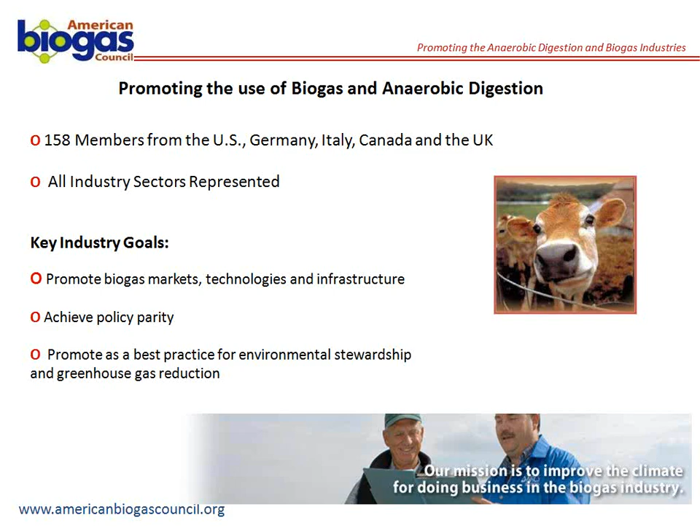To briefly introduce you to the American Biogas Council, we are the overarching trade association in the U.S. that promotes the biogas and anaerobic digestion industry. We have almost 160 members that span the entire supply chain, including manufacturers, engineering firms, project developers, financiers, and many other interest groups. Some of our key industry goals are to promote biogas markets, technologies, and infrastructure, achieve policy parity with other renewables, and promote anaerobic digestion as a best practice for environmental stewardship and greenhouse gas reduction.

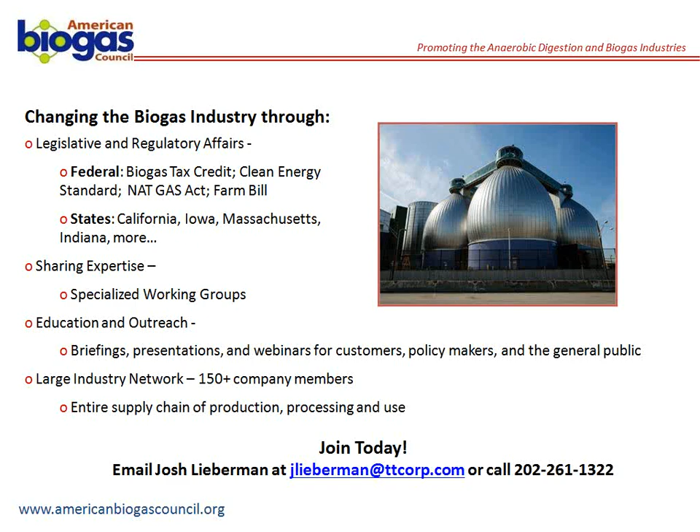We're changing the biogas industry through legislative and regulatory affairs. We lobby for and support public policy at both the federal and state level that benefits and promotes the use of AD and biogas production, through our specialized working groups that draw on the expertise of our members to address key focus areas, and through education and outreach activities focused on building widespread awareness of biogas and its benefits through webinars such as this one, briefings, presentations, and other such means.

So, on to our speakers. Our first speaker is Richard Maddox, he is Senior Technologist at Biomethane. We have Trevor Nicol, who is General Manager at Highmark Biogas, and we have Tom Ferencevich, Vice President of Technical Services at Yield Energy.

To introduce our first speaker, Richard Maddox: Richard has been a Senior Technical Advisor for High Solids Digestion Systems at Biomethane for the past 6 years. He has contributed to over 100 digester projects, including direct management coordination of 20 animal waste methane systems, assessing technical and financial feasibility, financing, design, review, regulatory compliance, energy and byproduct recovery, processing, and sales contracts. He has provided consulting services to both public and private clients in the States and overseas, and has performed several dozen farm and centralized digestion system feasibility studies. And with that, Richard, I hand it over to you.

Very good. Mandy, were you going to advance the slide there?

Thank you very much for this opportunity to discuss a topic that I think most of us will agree is of immense importance to the industry: the methane potential of the substrates that we're digesting. This presentation addresses methane potential of substrates. My fellow panelists will be discussing handling of this often non-homogeneous material that we put in the digesters. Biomethane potential, BMP, is far too large a topic to discuss in only 15 minutes, but I recommend you sit back and listen to the presentation and then go to the slides once they're available. There's quite a bit of material for you. This is a quick review, folks.

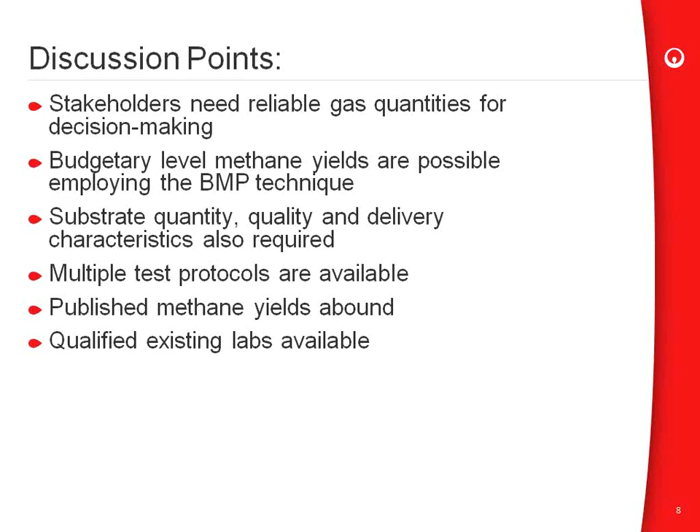The message to be conveyed in the next few moments is that stakeholders need numbers to make rational decisions. The BMP test is one of several ways to know the quantity of gas that can be derived from a waste, and it's a good way to get a good budgetary estimate. Substrate quantities and qualities, as well as delivery schedules, are important to know. There are multiple BMP testing protocols out there, many substrate BMPs that are published, and many testing labs available.

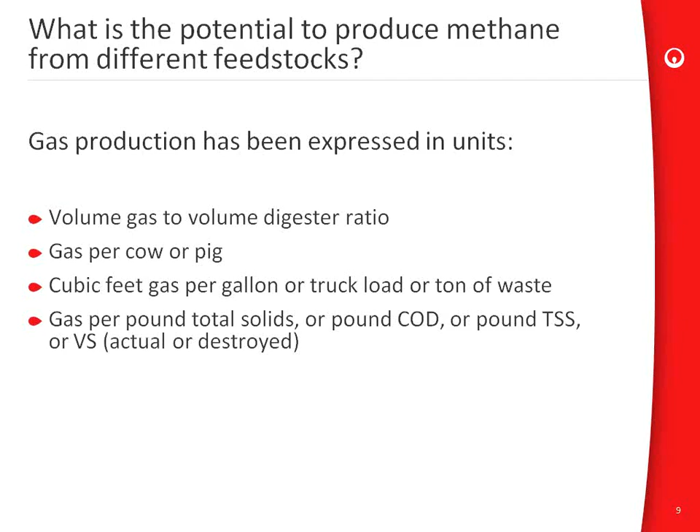The question is, how much gas can be expected from a waste? There are many ways to measure it and to report it.

You probably have heard about how much gas can you produce per digester volume, or how much gas per cow, or how much gas per pig, disregarding whether it's a black cow, a red cow, a pastured cow, or a 70-pound pig versus a 280-pound pig. More recently, we've also heard about cubic feet per gallon, truck, or ton of waste, and increasingly there's awareness that we need to report gas production per pound total solids, pound COD, TSS, or VS.

So what's needed is a single meaningful metric.

The biochemical methane potential is a useful number regardless of waste or condition. Simply put, it's the amount of methane that can be expected from a kilogram of volatile solids in a substance.

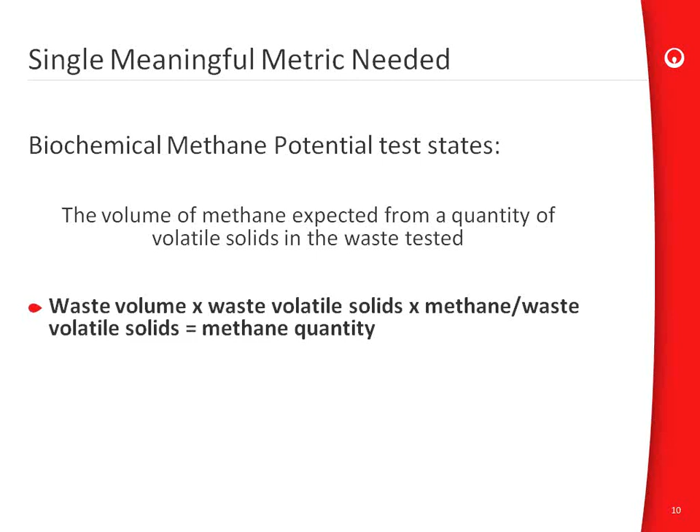Once you know the volume of waste you're going to be processing, and through that the quantity of volatile solids to be processed, you multiply that by the all-important BMP number—the methane that can be expected per unit mass of volatile solids—and you end up with a methane quantity.

Who needs to know the number? Who are the stakeholders? Owners, the money folk, all need to determine the financial viability of their venture.

System designers need to know for purposes of design and peak energy demands. Process designers need it for system and operational designs. And operators need to know in order to formulate their daily recipes.

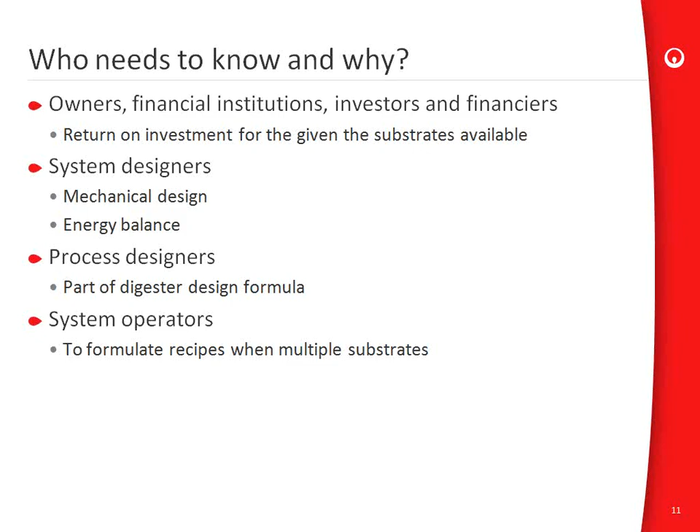We just started up a system not too long ago that works with close to 200 different substrates and substrate dilutions. Tom will talk about feeding the bacteria at a rate so as not to upset them, a bit later on.

Before we start the methane yield discussion, however, we need to recognize and admit the methane yield of a substrate is meaningless in predicting total gas unless we also know what the quantities are of the substrate that's going to be processed.

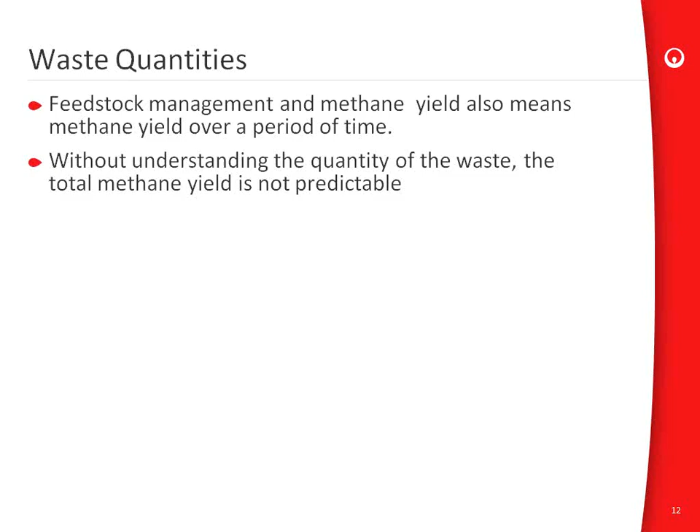The question relating to this substrate availability is: do you design for maximum flow and have stranded capital during part of the year? Or do you design for something less and you see a flare? And the all-important question that's often overlooked: do you have enough gas when you need the energy?

Trevor's going to be talking a little bit later about feedstock supply and availability. Of course, it's a very important topic.

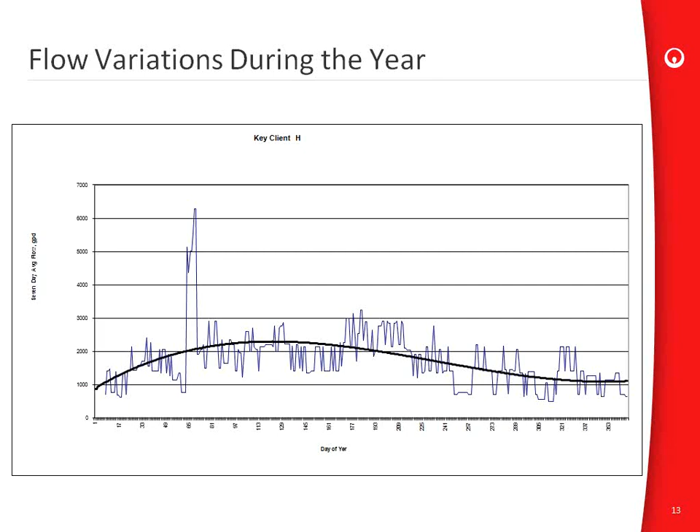So back to the topic at hand: how much gas can be expected from a substrate? There's a variety of different ways of determining how much gas you're going to be able to produce per unit substrate.

These are all ways to derive actual values from the interaction of bacteria with the substrate. One really interesting way to find out how much gas you're producing per unit substrate is to build the system and find out—hopefully you get what you were expecting.

Another, more rational approach, often is to have a smaller pilot scale system, less expensive, and you can still generate good numbers. Bench scale systems are smaller yet, significantly less expensive, and still can generate some pretty decent numbers in terms of how much methane you can expect for the substrate.

What we're going to be talking about more here as the conversation continues is the small scale lab test, the BMP test. BMP tests are small, reliable, inexpensive, and can provide you 10 to 15 percent accurate budgetary values for gas yield of a substrate to be tested. The technique also helps you identify some potential toxicity issues. And there's also...

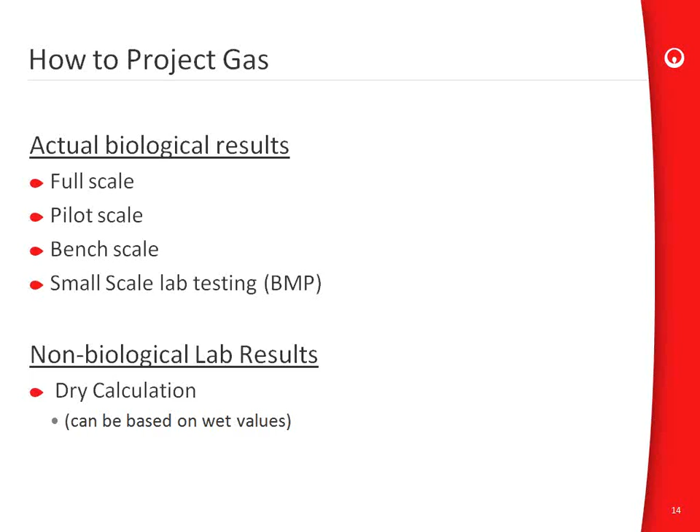Non-biology-based ways of predicting gas: you essentially do spreadsheets using some rules of thumb and perhaps some laboratory analysis combined with rules of thumb.

The BMP test determines the ultimate methane potential of a substrate. It does not permit actual design of the digester. It's a fairly simple procedure: you put a known quantity of substrate in an airtight glass vial with an appropriate quantity of seed, hold it at usually right around 98 to 100 degrees F, and you measure the volume of gas, note the cumulative quantity of gas, and create a curve.

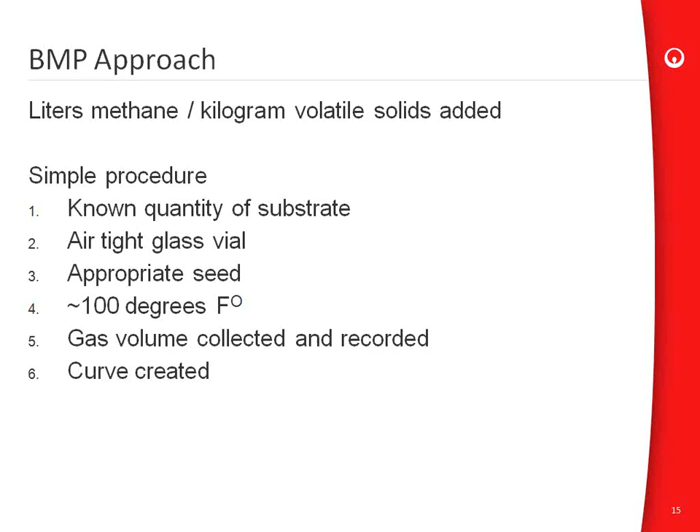But the results are only as good as the laboratory that's implementing them. Labs must adhere to accepted protocols.

They need to maintain good laboratory techniques, use acclimated seed, employ the proper seed-feed ratios, and of course you have to back out of your results the gas that is contributed by the seed itself in your curves.

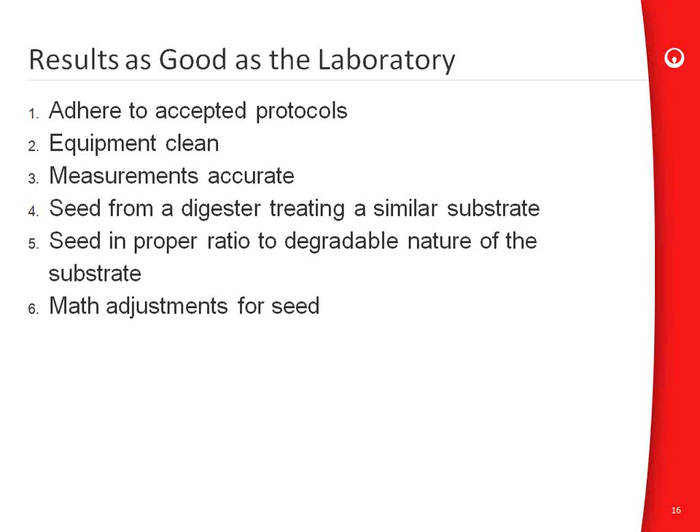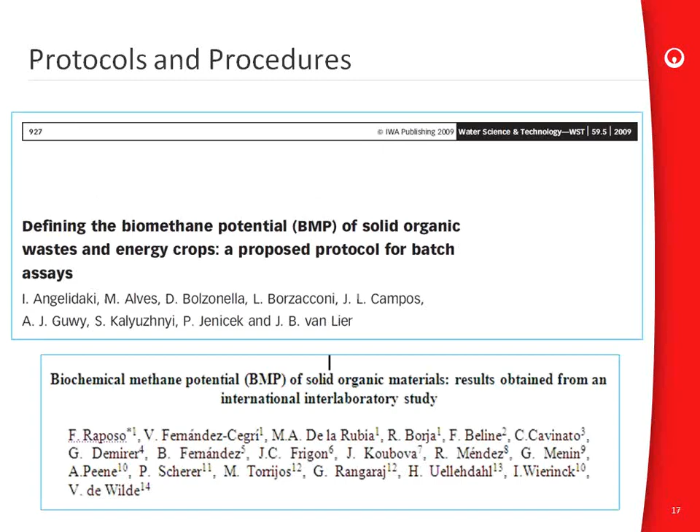Several protocols are available. Here's a few of them. I tried to include a lot of references here so you can go back and find this material yourself.

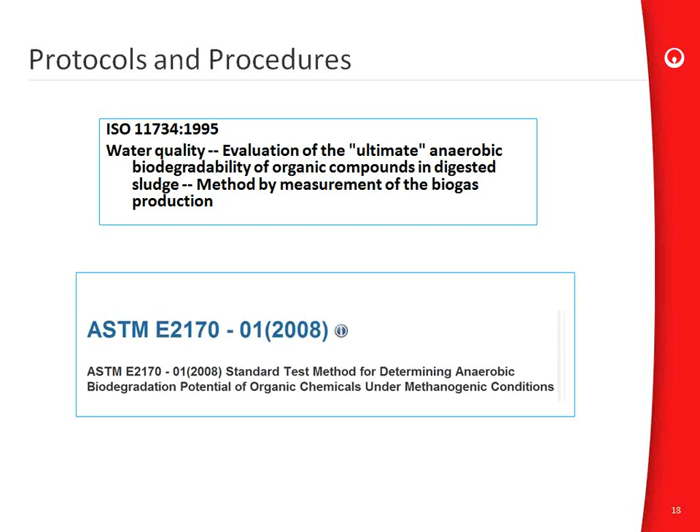You'll notice there's an ISO standard for biomethane potential determinations, and here's an ASTM standard. And here's the granddaddy of them all - a publication put out by Perry McCarty and his colleagues at Stanford in the 70s.

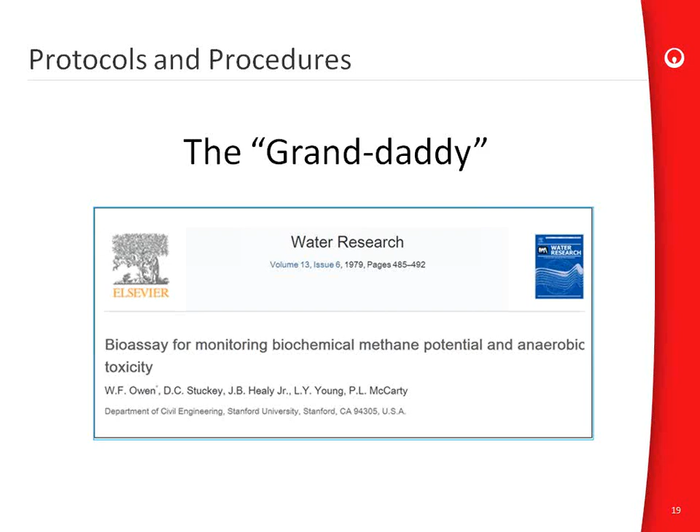Before the test begins, you have to secure and analyze as representative a sample as possible that you're going to be testing. You also need to secure seed material from a digester that's successfully treating a similar type of waste.

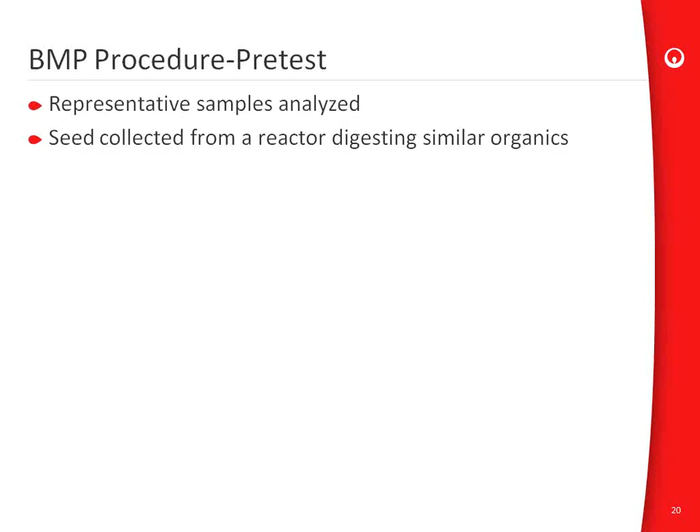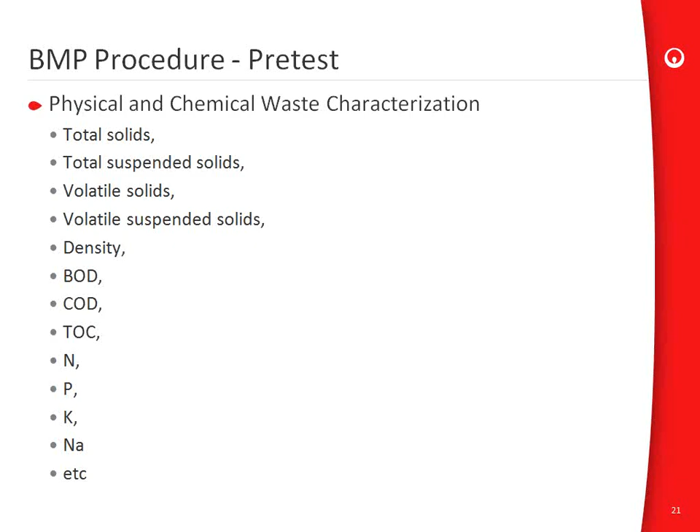Have a lab characterize the substrate. There's a number of different parameters that laboratories will perform, but pay particular attention to density of the substrate and the volatile solids of the substrate.

Getting specifically into the test itself, the test is conducted in vials, often referred to as serum bottles. The protocols call for 160 to 200 milliliter serum bottles. All the tests are done in triplicate.

The experimental design is that you have the actual sample itself, measured in triplicate. You have triplicate vials of that, vials of the sample slightly diluted, and samples further diluted, all with 3 vials each. Then you have 3 vials of strictly the seed material, and 3 vials of an assay material - something where you know what the ultimate methane potential is.

Acetate, cellulose, and others are quite often used.

Procedure: you put in the vial the substrate to be tested, a seed material, and a nutrient mix. You flush that vial with nitrogen and/or carbon dioxide, and seal the vial. You hold it at about 100 degrees for anywhere from 20 days up, depending on what the material is and how the curves look.

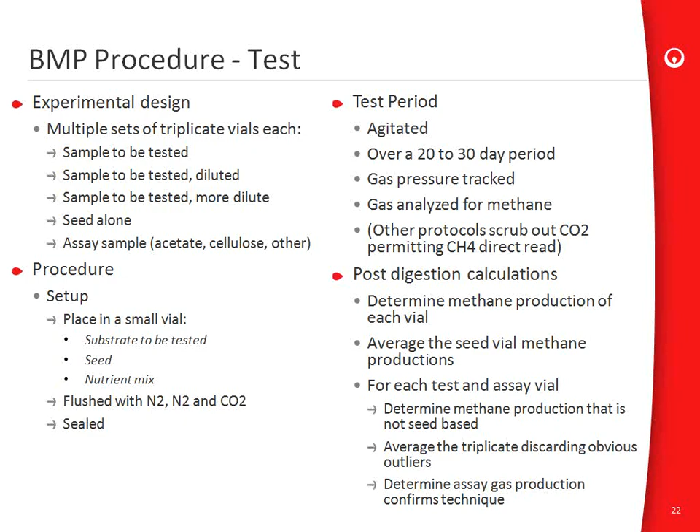The assay test is an opportunity for you to check up on your technique. If you know what the gas should be for the assay material, you're running the test and you'll see how close you get.

An alternative method is to put pressure transducers in the septum of the bottle and through some math determine how much gas is produced on a daily basis. There's also other ways to continually monitor and digitally record the gases being produced.

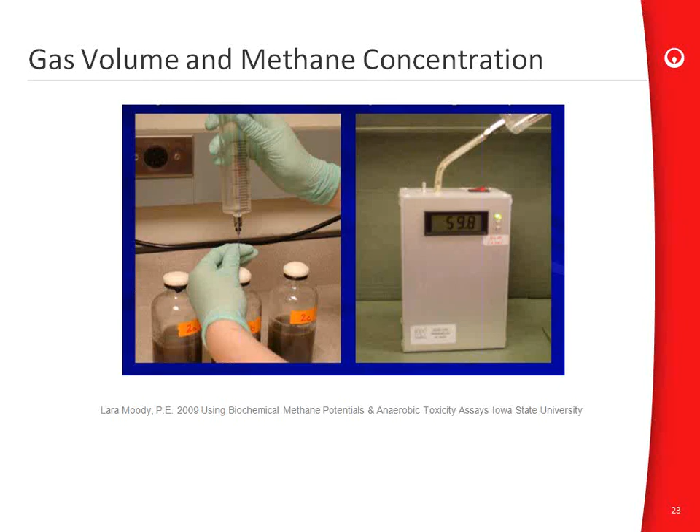What you do then is take the gas volumes determined periodically and plot out the cumulative quantity of gas. What you're looking for is the point at which the gas production levels off - that's your ultimate methane yield.

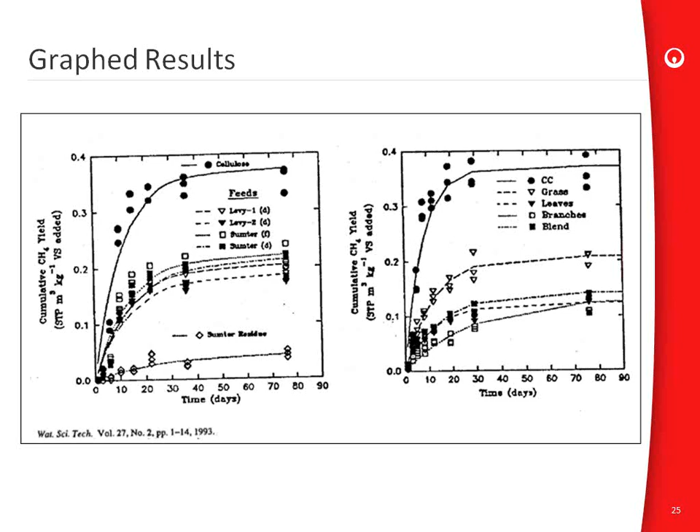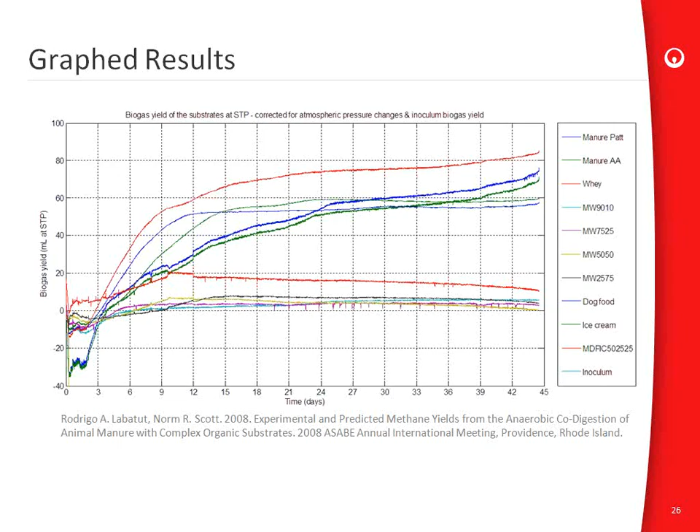Here are some BMP results. Again, go to the citation, and there's many more of these results that you'll see in the literature.

Here's some rules of thumb for you. If you had strict carbohydrates, expect 300 to 350 or so liters of methane per kg VS added. Proteins, a good number to get your arms around is 450 to 550. Fats, 800 to 900 or so.

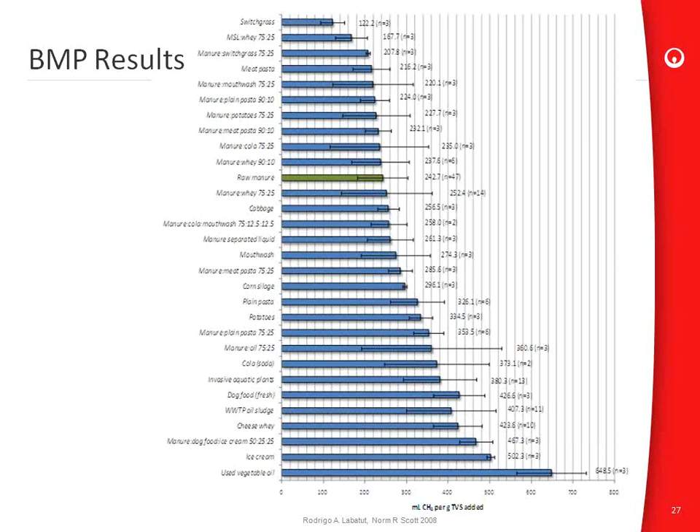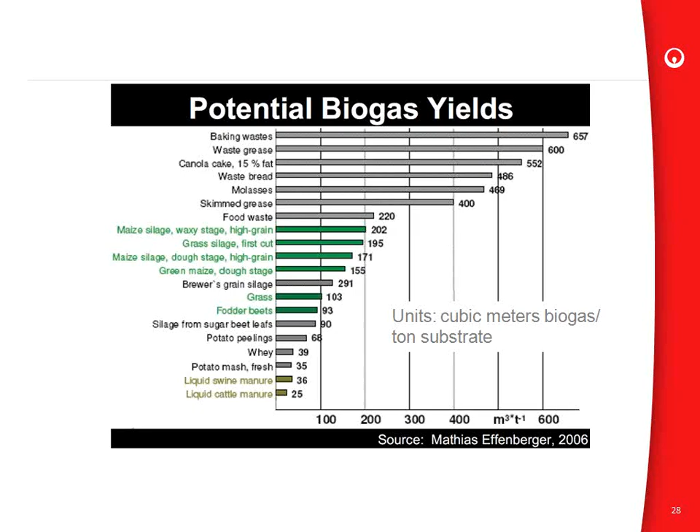Next slide. Gas can also be estimated from the substrate characteristics, just getting some lab numbers and doing calculations, though the values may differ rather significantly from what you see when you actually subject the bacteria to the substrate.

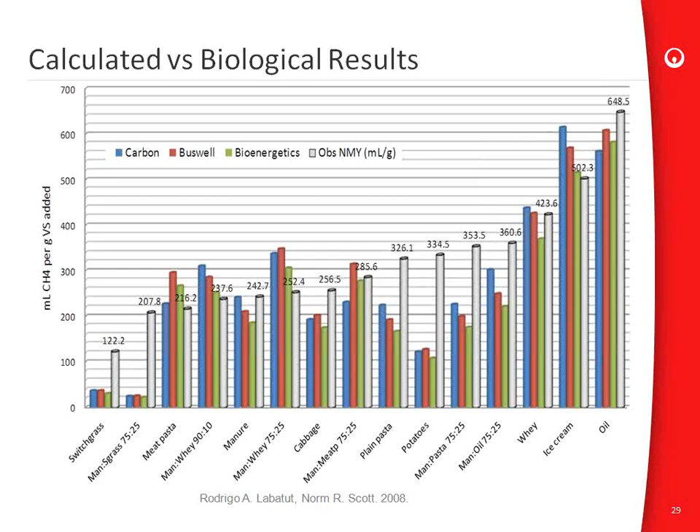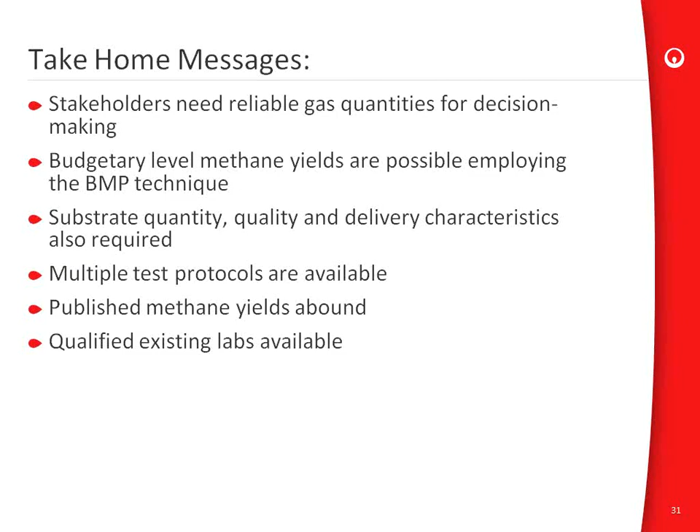Next slide. Contact me if you've got more information, if you'd like more information or more discussion on this.

Andy, how'd I do with my schedule? Keep it under 15 minutes. You're right in time there, Richard. Thank you very much, that was great.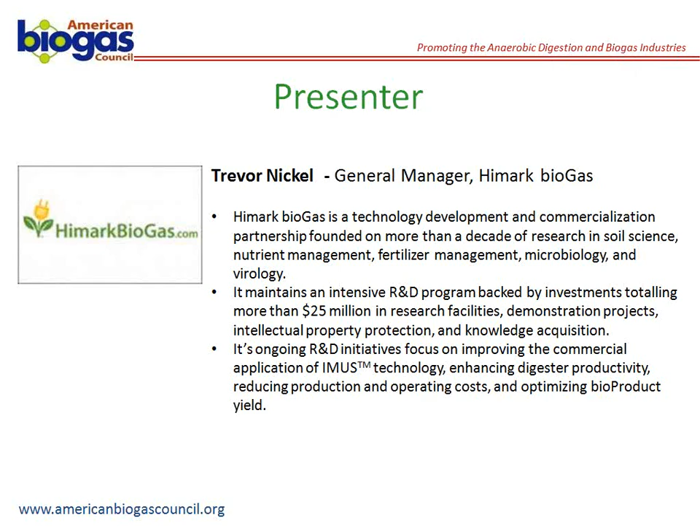Thank you, Nandi, and thanks everybody for the opportunity to share some of our observations on materials handling in anaerobic digestion. If we go to the next slide, I can just give a brief outline of what we'll try to talk about today in the very short period we have together.

I'd like to just outline the importance of materials handling in digestion and where that comes into play. I'll talk about something briefly called the ease availability paradox, the importance of matching feedstock with your digestion approach first and equipment selection second. And then we'll break down a feeding system for a digester into receiving, pre-processing, conveyance, and injection, and maybe have a brief discussion about the equipment selection involved in all that.

I'll take a moment here to just talk about where we come from on this. More than a decade ago, the founders of our organization - not intended to be an endorsement, just a story - owned a very large feedlot and were approached by well-meaning scientists saying, hey, you have a lot of manure, 500 tons a day, you should be doing something with it that generates value other than just replacing fertilizer. And they thought that was a good idea, and then they turned the question back on the scientists and said, okay, what should we be doing? And 10 years later, we now have a solution for 500 metric tons a day of feedlot manure.

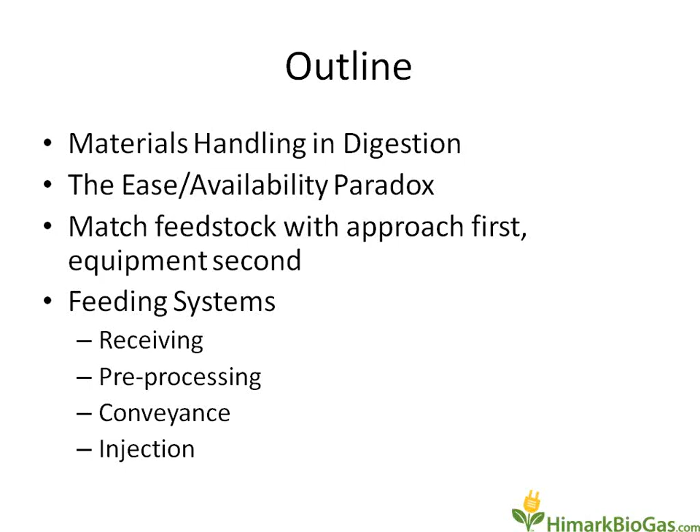If we go to the next slide, we'll talk about where materials handling happens in digestion. At the bottom of this slide, I've put a very basic block flow diagram of a generalized anaerobic digester, where we have feedstock coming in from the left through receiving, through pre-processing, through conveyance and injection into digestion, and then after digestion through post-digestion processing.

All of the boxes with yellow borders are areas where materials handling is critically important for function. I'm going to focus most of my comments on the green colored boxes: receiving, pre-processing, conveyance, and injection. It may come as a surprise that we can break this down into this many steps on a generalized block flow, and even more steps in actual engineering design of a facility, given that this is often a pit or a hole in the ground, or even worse, just a tipping floor. The actual conception and design of this is a major consideration in the design and operations of an anaerobic digestion facility.

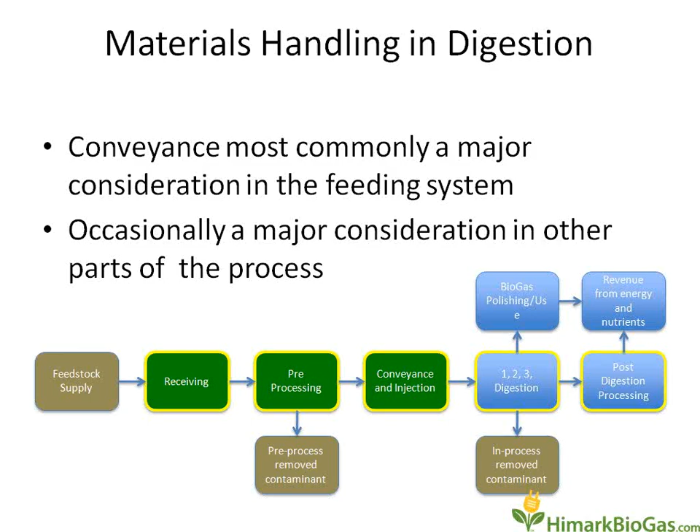If we go to the next slide, with that in mind, this is the ease availability paradox. Simply put, a given material is much more abundant and available if it is more difficult to handle, especially from the perspective of an anaerobic digestion operator. If nobody else wants it, it's likely to be the stuff that's both cost-effective and easy to acquire. That means we have to design and operate our facilities in order to handle that available material.

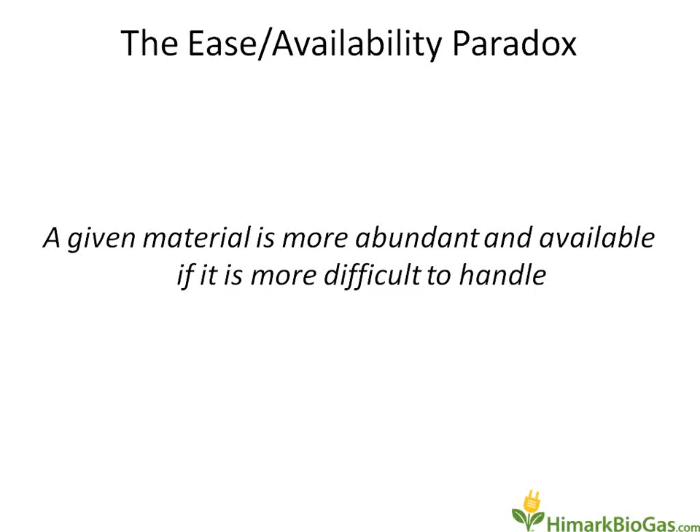Handling that available material means you need to first select an appropriate approach, and then once that approach matches with your available material, select the appropriate equipment to get that material in a form that will be most effective in the approach. Here's some lessons learned from observations around our industry and our own challenges over the years. It's all too common in our industry to mismatch the approach and the feedstock.

Some of that is just by virtue of the fact that we're a fairly nascent industry with relatively few vendors, and those vendors generally have one or two or a constrained number of approaches available to sell to customers, and customers are generally capital constrained, of course. We have seen a much too high failure rate in installed anaerobic digestion plants in our industry, and part of what we would love to see with the American Biogas Council's assistance is moving towards a much lower failure rate.

So in terms of best practices, when scoping a project, assess first the feedstock supply and available approaches that match that feedstock. Now, Richard's given us a really good background on what feedstock is.

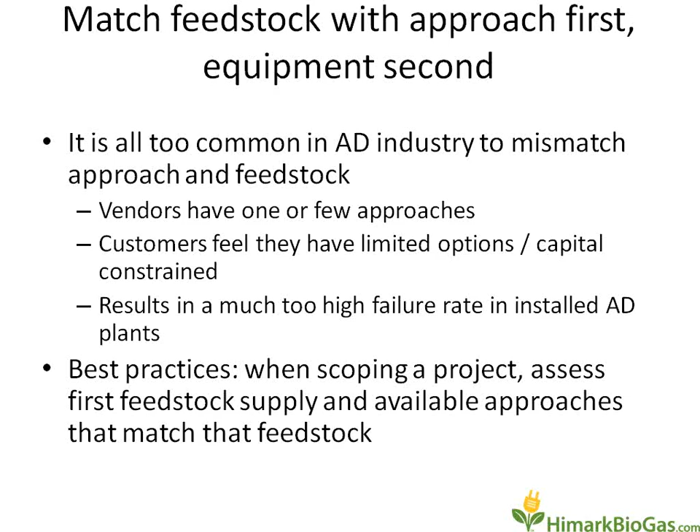So when we go to the next slide, you'll see it's no surprise that your first question is: what's in your feedstock? How much of it is water? How much is solid? How much of those solids are organic material? How much of those organic solids are recalcitrant? And how much of those solids are inorganic material, things that will cause problems and wear in the digester, whether or not they're small particles such as sand and gravel, or larger particles such as wrenches and boulders and tractor parts and cattle skulls.

On the right-hand portion of this slide, there are two substrates pictured. Both have the same water content, and so the same solids content and volatile solids content, and yet they're completely different materials handling challenges. The top picture is very nice, generally homogeneous dairy manure, and the bottom picture is very heterogeneous vegetable waste feedstock. Both of these are targeted for the same facility, but have very different materials handling questions around them.

Some of these questions fall out not only of the nature of the feedstock, the physical characteristics in terms of solids content and organic content, but also the particle size distribution, whether those particles are generally homogeneous or generally heterogeneous. It's almost worth making very broad categories on this, because all of our substrates are generally heterogeneous, but moving that category limits out.

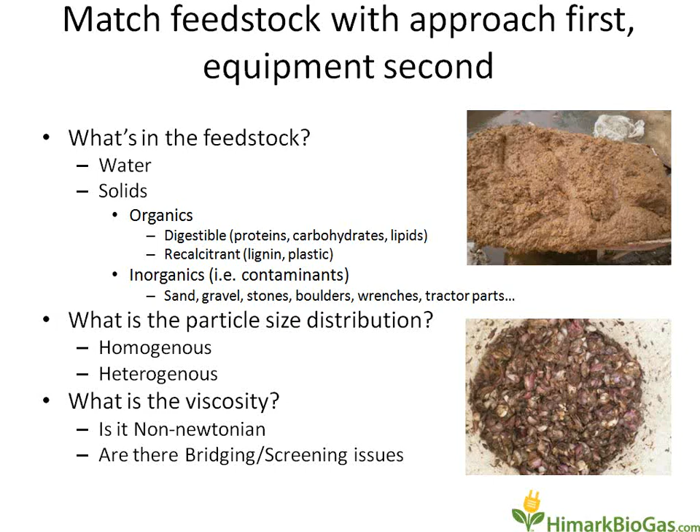So like ketchup or cornstarch, will it thicken when we attempt to move it, or thin when we attempt to move it? And will it bridge and cause issues with screening? These are the major questions.

Now we can talk about some solutions. The most common approaches for very liquid feedstocks involve some lagoon digesters. For lower solids feedstock, we see lagoons and some high rate digesters. Sometimes we see plug flows and CSTRs, the way we'd see in low solids digestion. When I say CSTR, that's a fully mixed digester. For more solid type materials, we see other types of CSTRs, some modified plug flow digesters, and the spectrum goes all the way up to material that's extremely solid, which goes along with being extremely difficult to handle, requiring different approaches.

Now you can move one or two steps up or down this spectrum. So were you to have a 14% total solids dairy manure, it's entirely possible with appropriate pre-processing to go two steps down and use that in a mixed lagoon, or to go two steps up and use that in a dry fermenter. But both of those would require pre-processing, and pre-processing is expensive. So as you move further away from the appropriate approach, you add cost and complexity to the system. This is why matching feedstock with approach first is critically important for your materials handling selection, and then matching with your equipment second.

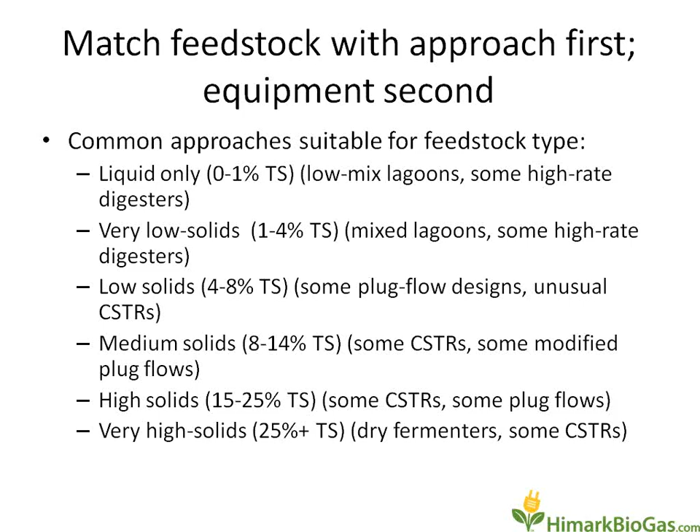Your feeding systems generally vary with approach, but they combine the steps we've talked about at the beginning of this presentation: receiving, pre-processing, conveyance, and injection. And if extensive pre-processing is required, it may be that the approach does not match the feedstock, and going back to the drawing board to broaden the selection of approach is often a good exercise, especially in the early stages of developing a project.

If the approach and the feeding system do match the feedstock, you can get a very high level of reliability in your facility. If it doesn't, by contrast, the feeding system becomes the point of failure, or the point of lowest reliability. I think we've all seen examples of digesters where the feeding system is the major headache. Not all of that is equipment selection - some of it was simply approach selection that could have been thought through a little differently.

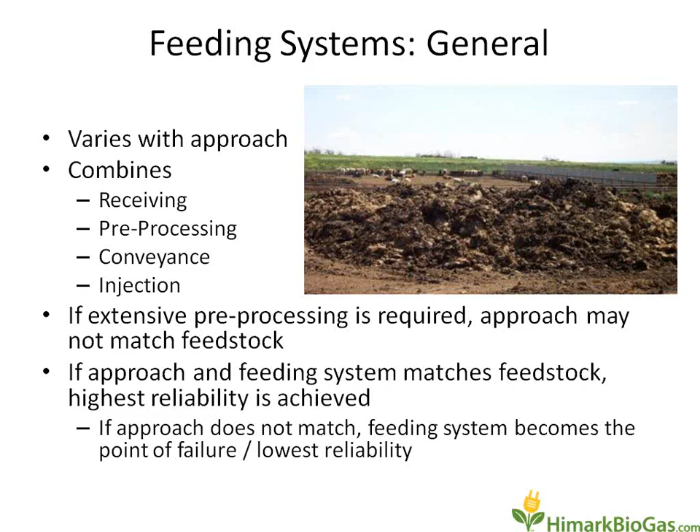If we break down the feeding system into a receiving system to begin with, you'll note that if we look at the feedstocks along the same categories we talked about for approaches, your receiving systems are generally set up to handle that degree of total solids level. So a liquid is often a directly injected system - a wastewater digester is often injected directly into the digester.

It may be a consideration to include a surge tank for very good reasons. For a very low solids digester, it's usually direct injected, sometimes with a surge tank. For low solids digestion, you generally see a receiving pit, sometimes open or a closed tank - very good practice - which needs some sort of mixing to keep the material from stratifying during the time it's in the receiving system.

Similar for medium, thicker substrates coming in a receiving pit or tank, or a specially designed hopper. As you get into higher and higher solids material, you'll see tipping floors being employed with multiple steps - a tipping floor, a specialized hopper, a specialized screening system, and potentially a receiving tank or pit following on from that. In terms of the most appropriate material, as you go down this list, things get more expensive.

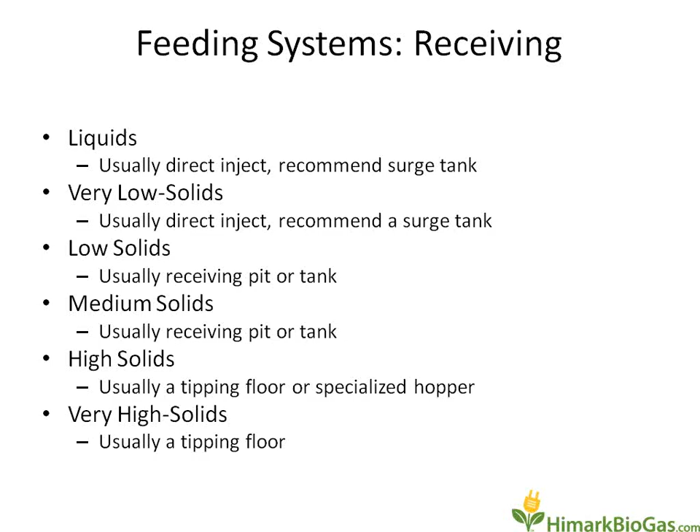Going to the next slide, we can talk about pre-processing, and I know Tom's going to talk a little bit about pre-processing later, but there's a couple main categories of pre-processing where materials handling is a critical concern.

I'm not really going to talk about tempering, where we add water or add heat and in some cases remove water. That's fairly typical practice, and I think most everybody and every system does some form of tempering or other, especially when it comes to temperature management.

We'll talk a little bit about pre-digestion. There are several methods of enhancing the hydrolysis, so the first step of anaerobic digestion, through materials handling in either mechanical or biological and sometimes thermal methods.

So pre-composting makes use of natural biological action. You can pile up your substrate and allow bacteria to attack it for a period of time, which can enhance the digestibility of that. It can also enhance the materials handling suitability of that. So every time you pre-process, you can think of it as moving it towards the more liquid end of the spectrum, and in many cases moving it towards the more homogeneous end of the spectrum.

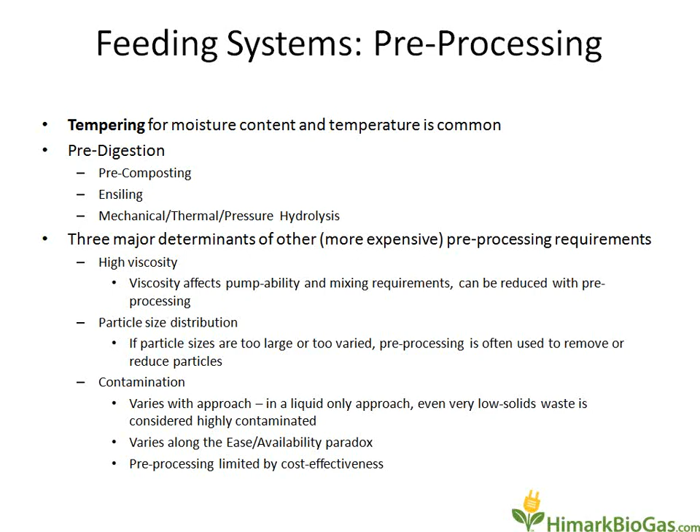Moving on, the more simple part of the feeding system. So the next slide talks about conveyance.

Obviously, if you're conveying liquids, you can use a water-type pump, but as you move up the viscosity and thickness spectrum there, you need more and more specialized pumps. Your water-type pump is not likely to be able to move a 14% total solids dairy manure.

So a special pump type must be selected, whether or not that's a progressive cavity pump, or in some cases for very high solids, you're looking at very special pumps such as are used in the concrete industry, piston pumps, that sort of thing.

Generally speaking, as you get to the higher end of the spectrum, the material is only pumpable with extensive pre-processing. So you start seeing belts and walking floors and moving floors and augers and screws as the conveyance items, to the point where you can get that material either injected into a digester or mixed with water so that it can be tempered and pumpable.

In almost all these cases, the more moving parts you have in your conveyance system, the more susceptible it is to the inorganics in the substrate, and the more wear and tear they will be susceptible to. So the less moving parts, the better. And I think it's very important to consider that gravity is your best friend when conveyance is under consideration. So if it's possible to move your material under the assistance of gravity, it's very important to do that.

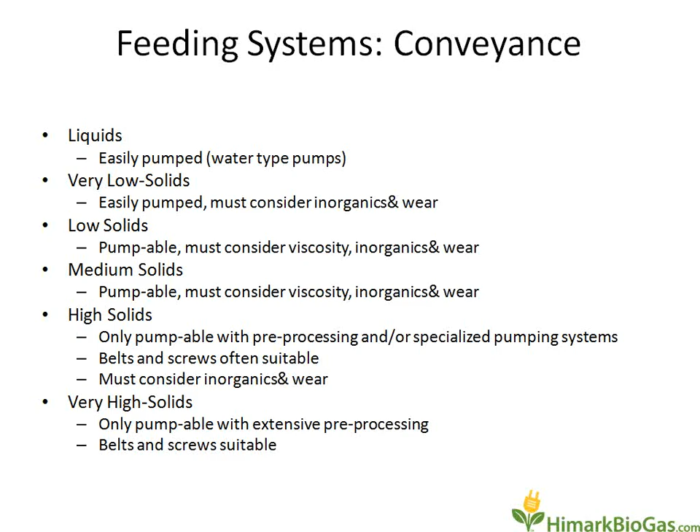Moving to the next slide, the last stage of the feeding system is injection. Simply put, that's getting the material squirted in, dropped in, or dumped into the active digester. So obviously once it's pumpable, injection is relatively easy. The only consideration is, can you pump against the head pressure that's available there, or if you're using gravity, do you have the line velocity to get it into the material?

If you are using a pump, how many pumps do you have, or is your pump a very reliable one? Oftentimes when we see systems operating intermittently, it's because they have only one pump to do all the work in the system, and when that pump goes down, the entire system can't function. So the question of reliability is a consideration there.

If your material is not pumpable, like in some very high solid situations, injection is quite a bit more challenging. You have to consider the distribution of the material once it gets inside the digester, things you don't necessarily have to consider when pumping a liquid in, as well as the spacing between the material when it gets into the digester. This is especially important in a dry fermentation or dry digestion type situation. Does the feed system match the requirements of spacing, porosity, that sort of thing?

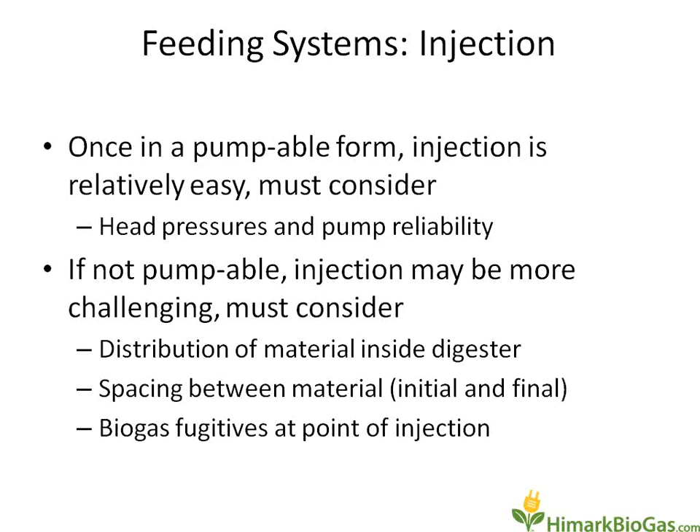This brings me to my conclusion slide, which is the last slide here. In conclusion, although I'm sure we wanted to talk about very specific pumps and conveyors and augers, there's no one-size-fits-all solution for anaerobic digestion feedstock. However, there's good news, and there's a great many approaches out there, some more or less suitable for certain types of material. But when you consider all the approaches and look at both the approach and the available suitable pre-processing steps that can be taken, we feel there is a digestion solution for all types of material. It's simply a matter of having the wherewithal to select both the best approach and the best feeding system equipment. We're here to help, of course, is the free advertisement there, but so is every other anaerobic digestion technology provider in the industry.

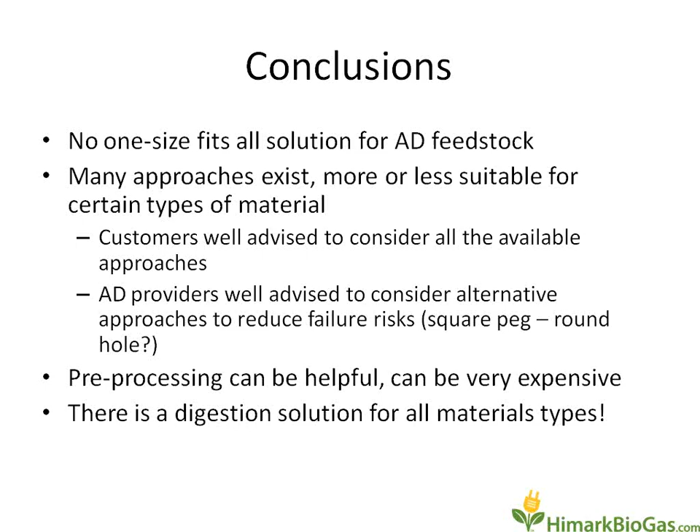I can guarantee you that nobody wants to see a failed digester on the basis of a feeding system that can't handle the feedstock it's being asked to handle. So the next slide is just my contact information if anybody wants to get a hold of Himark. We're very easy to get a hold of, and I'm looking forward to answering your questions.

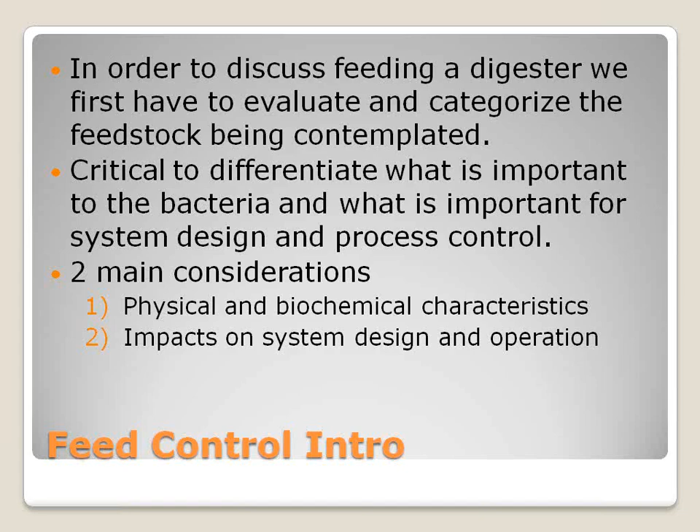The second point is discussing the impact on system design and operation. This is partly what Trevor was bringing up: your pre-treatment systems and how you actually feed the digester can have a material impact on how you control the amount of substrate you put in the digester, and ultimately what that looks like physically and biologically for the bacteria, which are the ones that have to do the work to make your money.

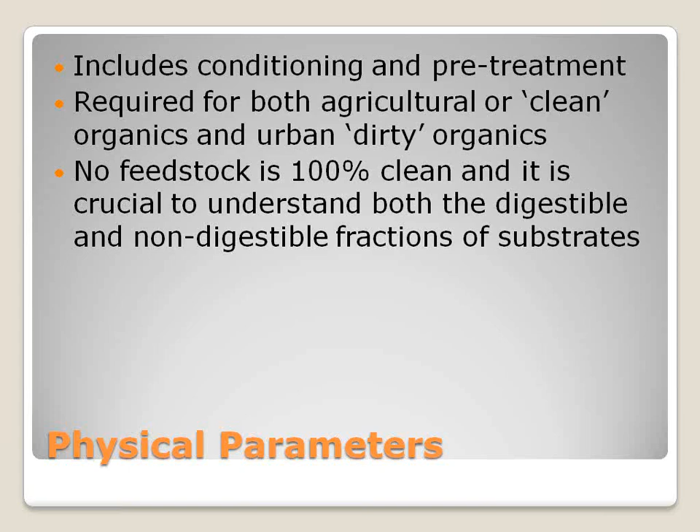Trevor touched on this, so I'll go briefly. This slide talks about clean substrate feeding and pre-treatment, and there are different things you can do—you can chop, mill, or grind. My comment on all these things is just to consider: when you do this, is this the only thing going into your digester? We're talking about agricultural feedstocks here, and maybe you can feed this completely dry into your system, but maybe you don't.

Maybe you have to mix water into it, so it's just to consider that certain feedstocks match to the right type of pretreatment. Really, when it comes to this substrate, usually it is what it is, and there's not too much you can predict ahead of time with confidence whether you'll be adding anything extra, like water, in your process.

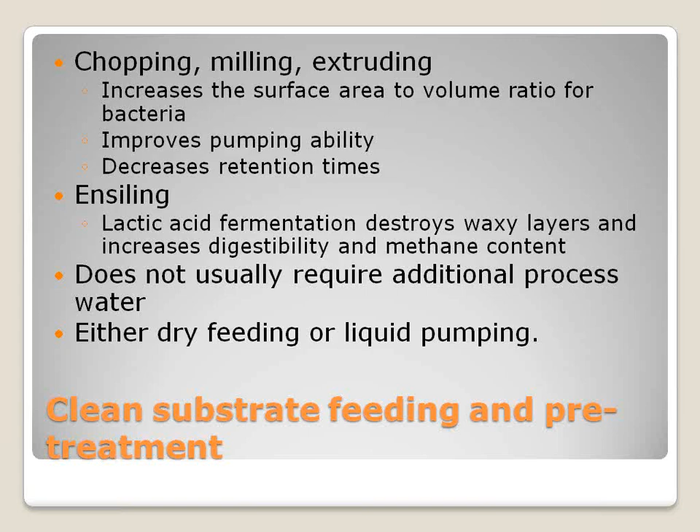When we talk about removing physical impurities, now we're talking about urban organics, or what I would call dirty substrate, things that have physical impurities. You can't just put things into a digester for your bacteria, right? So you have to actually do some things to it - particle size reduction, and separating packaging from the organics, and packaging could be from a store, or from people putting things in a bag in a municipal organics environment.

The typical equipment used in the industry is just shredders, screw presses, press type pumps, hammer mills. All of these things require special know-how, and they come with their own operating parameters, both from a time perspective and manual changes, but also from a water balance standpoint. So really, the whole point about substrate pretreatment when it comes to urban organics is all about density differences, and how you're going to separate your contaminated material from the packaging.

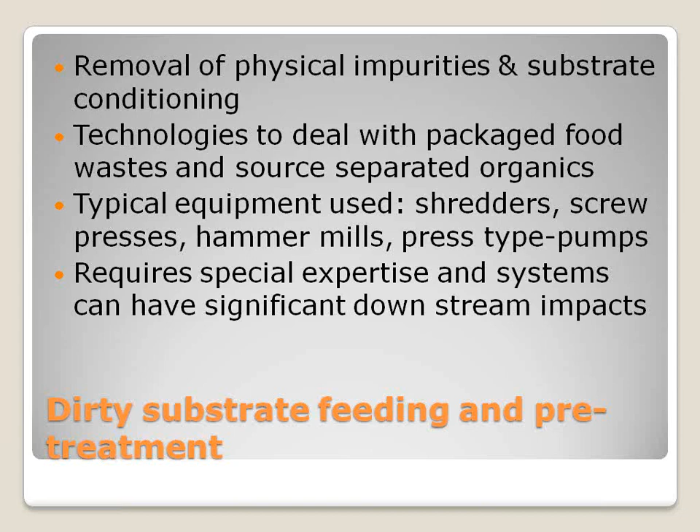In this scenario, there's two paths you can go on - either the high water use path, or the low water use path. This is how I'd characterize looking at equipment or systems for pre-treating and feeding urban organic waste. Why are we talking about this? The point is that your water balance influences how much food per cubic meter per ton you're feeding a digester. For example, if your equipment requires a 1-to-1 water to substrate ratio, you put 1 ton of feedstock in and 1 ton of water in to clean the substrate, then you're reducing your organic load by half.

So these are, at a high level, some of the number games that can come out of dealing with different types of feedstock and equipment and processes as you're considering your feedstock. Again, you need to know your feedstock - you need to know their characteristics, you need to really know about the contaminant fraction. You need to pay attention to these things and characterize them as best you can, because they're going to greatly influence your approach, and ultimately the scientific parameters around your biological stability profile inside your digester.

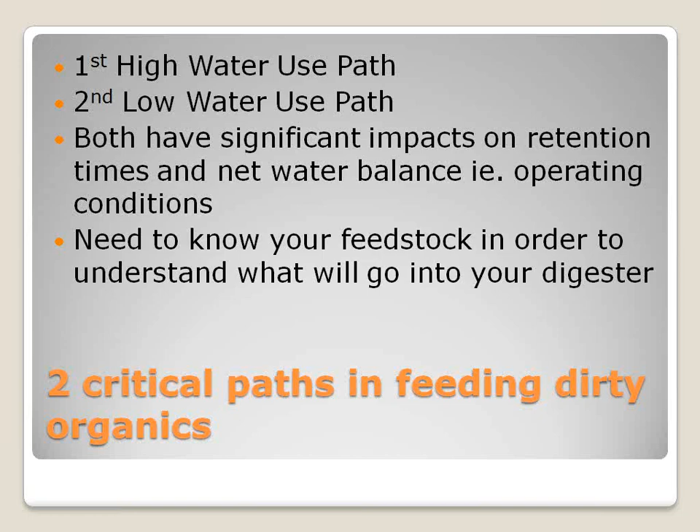So what are the impacts on the system of choosing different technologies to deal with this? The science and engineering of separation, as I mentioned, is based on density differences. Depending on whether you're looking at a retrofit case or a greenfield operation, if you're using more water, it could mean a lower retention time, or it might mean you need larger tank sizes, and so it's going to change your capital cost for the situation.

Generally speaking, when you're looking at screen sizes for screening out and filtering plastics, metal and glass, specifically with urban organic waste, the smaller the screen size, the more organics separated, but you require higher water usage. Larger screen sizes use less water, but then you're letting more potentially packaging and that contaminant fraction through as well. Also remember, with a smaller screen size, sometimes it's not so much about how much contaminants you're separating, but how much organics you're actually separating - this relates to an energy balance and why you actually get gas out of your system. You might be separating more organics than you realize that you're not feeding to the bacteria.

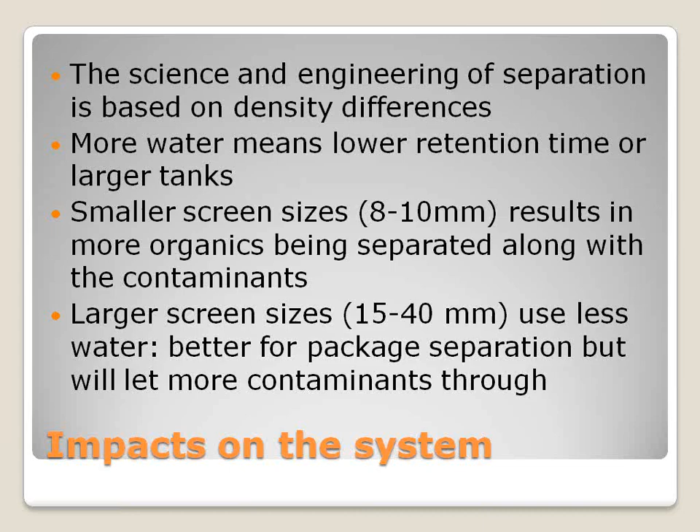So just quickly, at Yield we advocate multiple steps and phases in pre-treatment and cleaning. No single piece of equipment can clean organic waste enough to prevent downstream problems, so usually it's best to take a systems approach. Suspension slurries can be contaminant-laden and contain heavy fractions. Plastics, for instance, you mostly get them, but sometimes they make it through different systems. The heavy material is the hard part to remove in a single step.

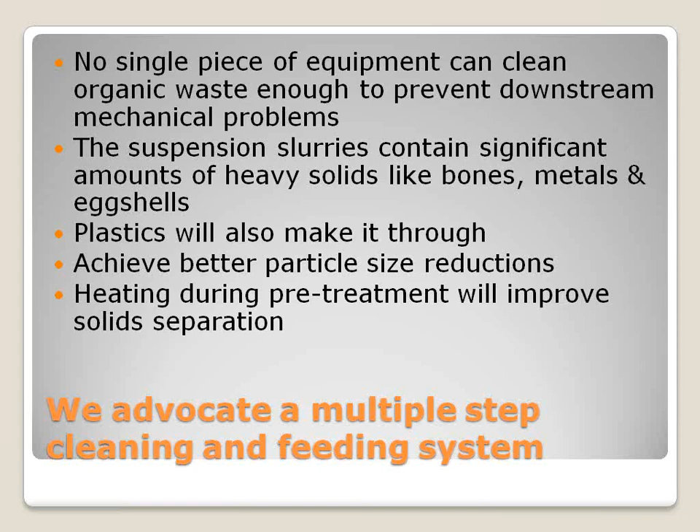You also want to achieve particle size reduction, getting smaller things, because bacteria don't have large teeth so they can't eat substrate very well, and they don't like to move, so they like to have food get to them. This is an important point. Heating during pre-treatment will also help with contaminant separation.

Now we're going to get into some of the biochemical parameters. ADs have suspended bacterial growth. Recall some of the parameters we discussed earlier: you've got your organic material, which contains a fraction of water, mineral ash component, and some contaminants, whether light or heavy plastics. Now this material goes into the digester.

Now what happens? You've got your suspended bacterial growth trying to destroy all those volatile solid compounds and produce gas. Just so we're clear, you can only get energy from carbohydrates, fat, and protein. You can't get energy from water, grit material, plastics, or ash. This is the component you need to consider when feeding your digester and maintaining optimal operating parameters.

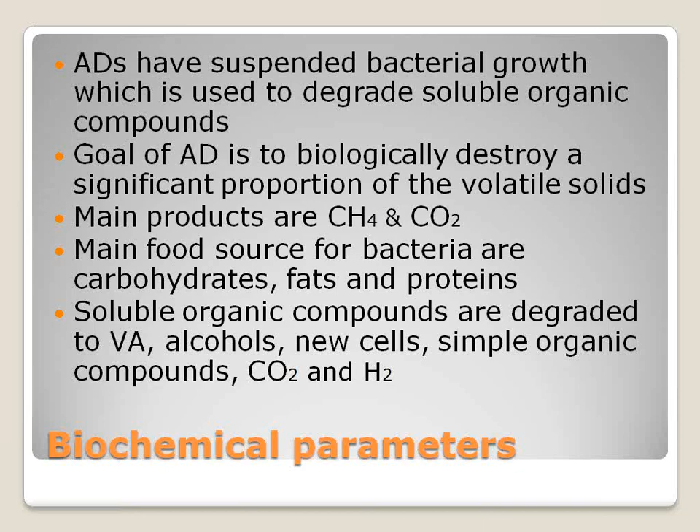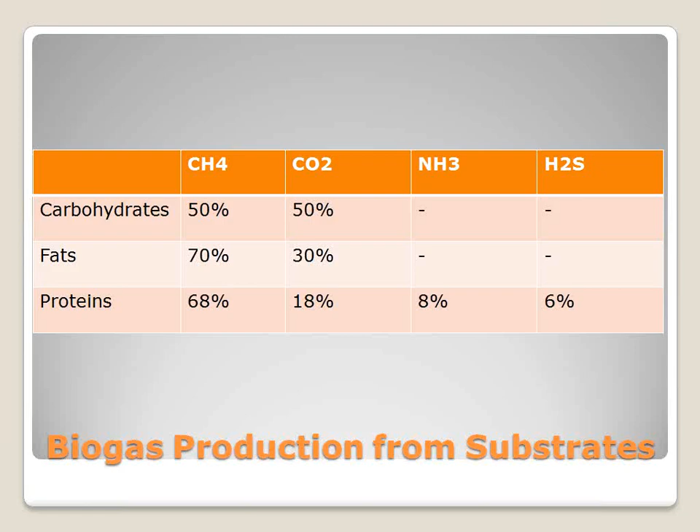Here's a chart showing what we get out of carbohydrates, fats, and proteins - the relative contributions to biogas from each substrate. Carbohydrates give roughly 50-50 methane and CO2. Fats generate about 70%, so generally more energy from fats. You get quite a lot of energy from protein too, but proteins are also problematic because they add ammonia and H2S. So for feeding control, it's the proteins you often look at with co-digestion - whether clean material from slaughterhouses or high fat and protein content material - where your organic load is much higher. The food is rich, like giving a cheesecake to bacteria, or a cheesecake to us - it's very rich.

In terms of defining these things, organic solids equal volatile solids - the terminology can get confusing, but these basically refer to things that can be digested. Your organic load is the load in kilograms per cubic meter of digestion volume per day. All organics contain a digestible and non-digestible fraction, and you have to include these in your mass balance because even though they won't generate revenue, they impact how you're feeding your digester. They impact how much food you can get, related to two parameters: your retention time and your bacterial doubling rates, which determine how much food you can safely digest and load in the digester at any given day.

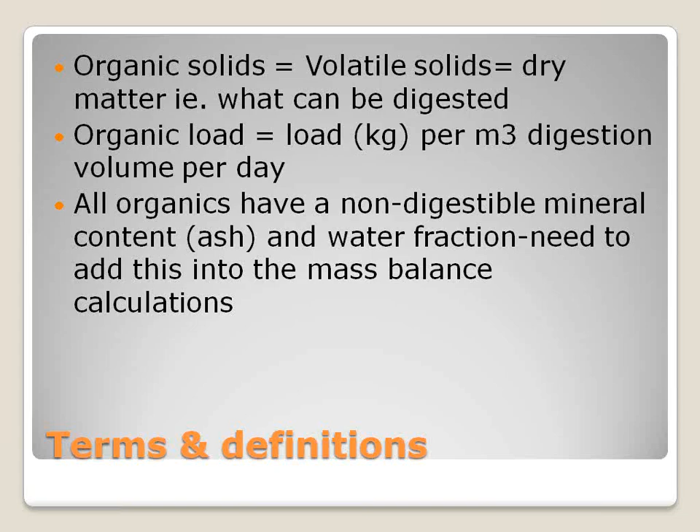So here, I've outlined the classical case of organic overloading. Generally, there's a couple of feedback loops that happen. This is a high-level look at what really happens when you get an overload situation.

When you've given too much food to your bacteria, the digester can't handle it. You've got a given volume, and too much food for the bacteria to digest safely, so you get a buildup of metabolites. When we talk about working velocity, the rate of those reactions I showed you in the previous slide, stages 1, 2, 3, 4, those things have to happen. When they all happen nicely and work their way through, your digester works really well.

When things start to go wrong, the typical case is too much food for the bacteria to digest in the retention time you've given them. So you get an increase in hydrolysis and acidification. Then the methane concentration starts to decrease and CO2 rises. There's some other feedback loops that happen here in terms of CO2 solubility.

The organic acid accumulation overwhelms the buffer capacity, so you get acidification, and the buffer capability of the system, the carbonate buffer system and the ammonia buffer system, can't work anymore. They're overwhelmed. You get inhibition of acetogenic and methanogenic bacteria, so hydrogen can't be passed on this pathway any longer, which also contributes to a buildup. Then your pH value begins to decrease, and as soon as it goes below 6.5, your digester will die.

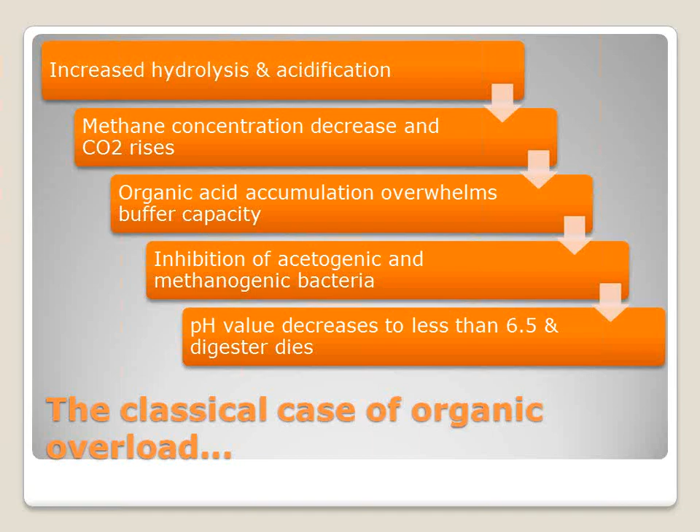So as I mentioned, just a summary of that: your organic loading rate is very high when this happens. Maybe it's insufficient retention time, so you haven't sized your digester properly for what you've intended on feeding it. There's a number of reasons this can happen.

We see it if somebody decides to take a load of something, a feedstock, that's great, it pays well for a tipping fee, but really their digester can't handle it. I've seen this a lot in cases where co-digestion is really where our industry in North America is at, and you're looking at the tipping fees coming with material, so it's sometimes hard for owners or operators to turn away something that's going to pay them.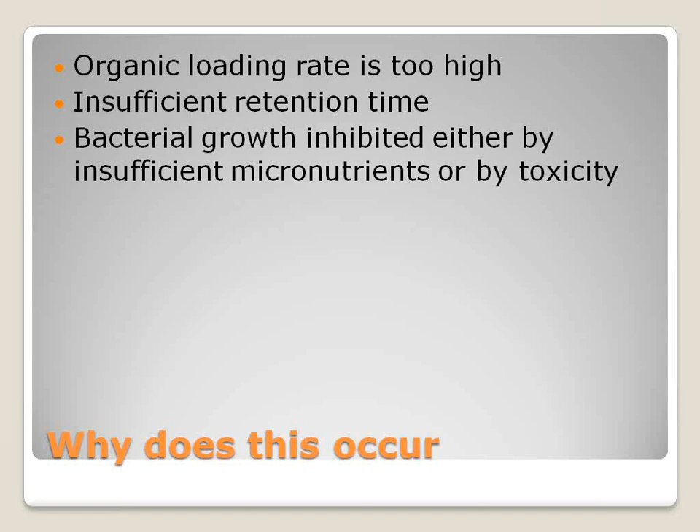But ultimately it may not pay if you've got downtime related to an organic overload and an upset, because you have to calculate your revenue losses from downtime, plus the fact that you can't take any more of this material, so you've lost the tipping fee as well. So do some good calculations on how you're going to feed this material, and remember that it's your bacteria that are your rate-limiting reactions to all of this.

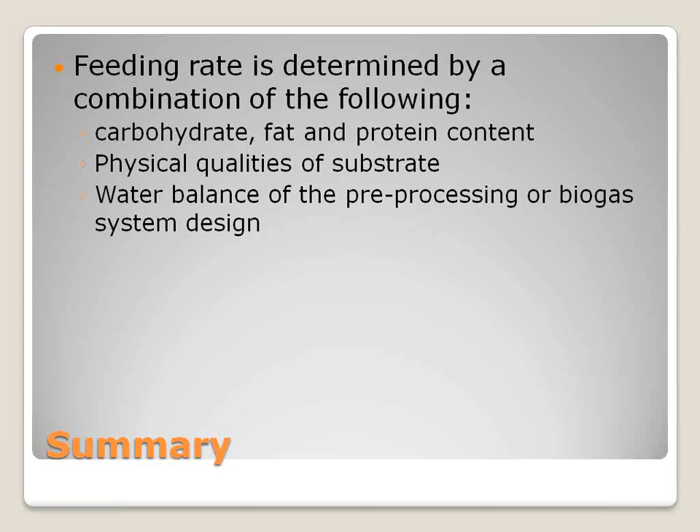And so these are just things you need to consider when you're making your system design and operating parameters. And that's the end of my presentation.